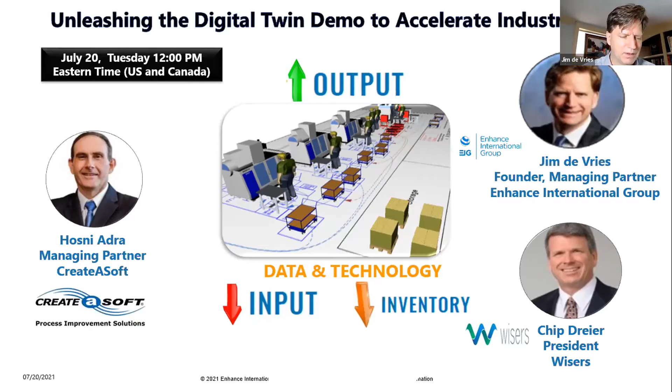Today we're focusing on manufacturing, and webinar 3 will probably be in September. We're still planning that out, and it will probably be in the warehouse management area, but we've done a lot of things in supply chain, so there'll probably be other webinars after that in other industries.

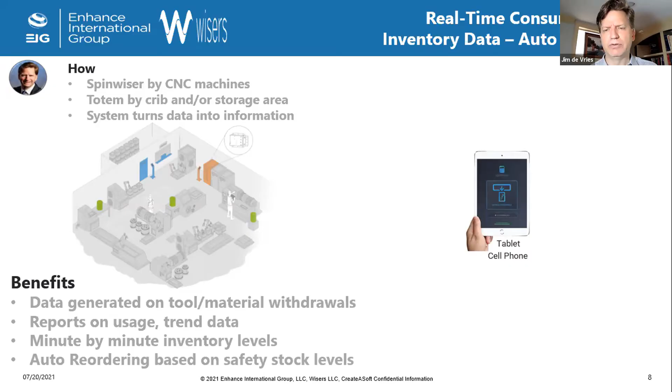So the Wisers system consists of a tablet, or you could use your cell phone, pretty flexible software. And the tracking of devices could be through smart lockers with locks, or it could be with shelves or shelving that's out there today, and you put locks on them, or specific smart lockers that are created.

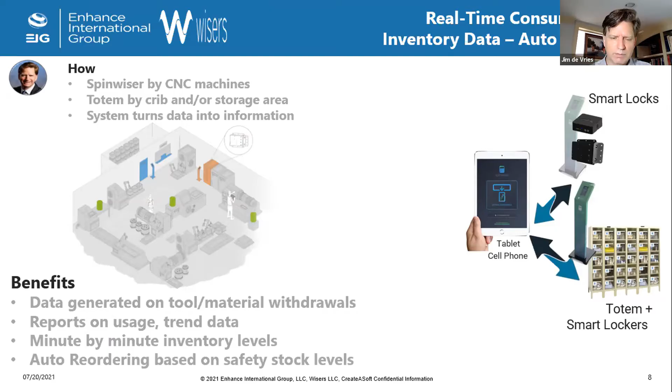And you're tracking the ingress and egress of all your different components that you need, all your consumables that you need. And then the Spinwiser, as you can see here, that has 75 different compartments and 5 doors. It's a carousel, again on the shop floor, close to your CNC machines.

That device is part of the system so that you can track all those consumables. So really, everything's right at your fingertips through a cloud-based system, or you can be on-prem if you like, providing you that real-time reporting of all your consumables, so at the shop floor and your management have clear understanding of where all your consumables are.

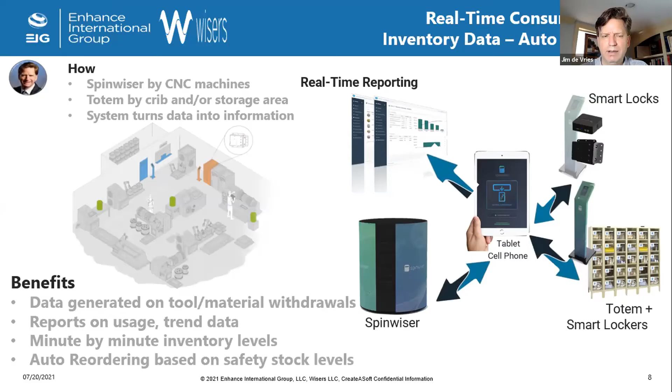You're never going to be running low on any consumables, holding up jobs. And just if you look at the wait time from finding a consumable, having to walk to the storage bin and storage area and coming back, the savings alone on time invested in producing parts is greatly enhanced.

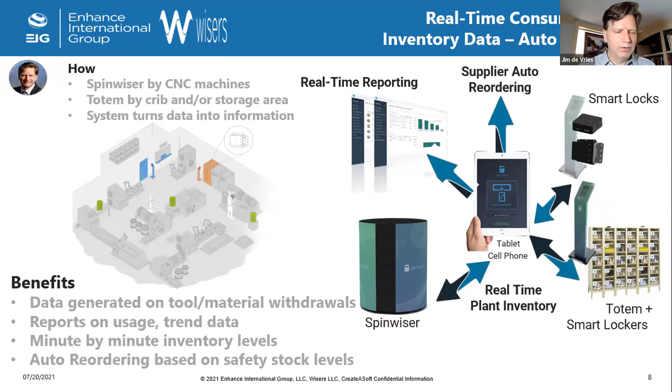So that's Spinwiser. That's a pretty unique system that's out there. And with that, I want to move on to...

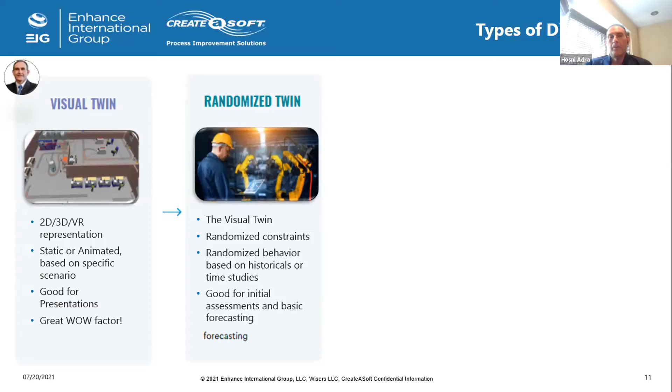The operation after that is to use a data-driven twin. And a data-driven twin does not increase in complexity that much from a randomized twin. It does have a lot of constraints. It has all of the key components of the digitization of the plant.

The one thing that it's going to add to the randomized data is that it's actually going to use your own data set. So what happens if you have seasonality, then you're going to load those seasonal data sets into the model, whether it's how the equipment are performing, the work order, the demand coming into the plant, the resources and manpower that you have, any fluctuation that will impact that. So it's actually going to run similar to how the plant actually would run.

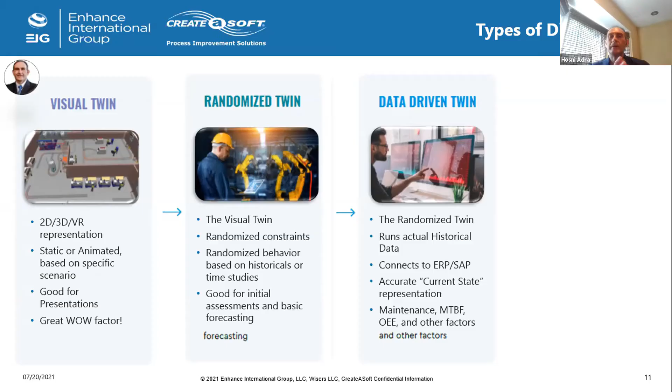So if you compare, say 2 weeks ago, load that data into that digital twin, you should actually see your plant running or your warehouse running based on that data set itself. The other key important part is it has to be able to load what we call the current state. So if you're going to do analysis on a data-driven twin, you always start from a known state that happened in the past, or what's happening at this point in time from the plant itself.

But once you have that data-driven twin, then you can really turn it into a learning model. You have an environment that basically reacts the same way as your operation. It loads the data and consumes the data the same way as your current operation works.

All you have to do now is add that learning aspect of it to say when you have a specific piece of equipment available, just because it's available and I need to run a product on it doesn't mean I'm going to use it right away. It might actually be detrimental to the schedule if I do that, because there's something else coming in the next 15 minutes that'll have better utilization of the equipment itself.

So from that point, you let that digital twin learn from the environment and start giving you better implementation, better optimization on the flow, and it's constantly optimizing in the background to help you achieve where you need to be.

So that's really where we're taking that data-driven digital twin environment, to be more of an online tool that's constantly looking forward and saying, what could happen to my operation? Where would my delays be? And how can I achieve better performance, not just on a day-to-day basis, but hour by hour, or depending on how fast your operation is, even on a smaller time scale.

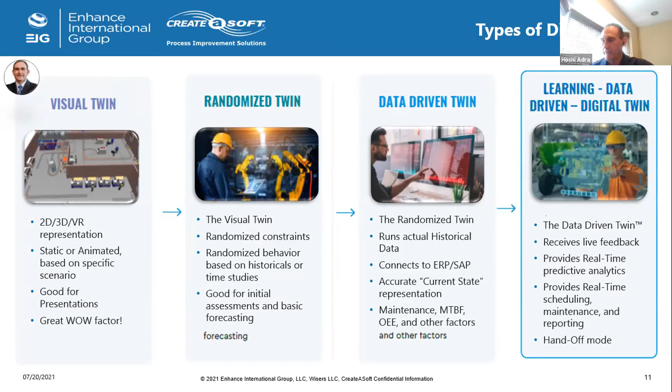From that point, the key to what you need to do is first define what your end goal is going to be and why you're implementing that digital twin. If you're only looking for the visual representation, by all means use the visual twin. You're going to spend the money on it, and it's just going to be different the moment you move one machine or one piece of equipment in the plant. If you're doing that in a warehouse implementation, once you reslot or add another rack, that's totally going to be different from an implementation point of view. So it's very important to define what you need to achieve at the end.

Then identify your progress. What are your target milestones that you need to hit? What are the key pain factors that you will need to address? Where will your most ROI be? And set up a plan of how you're going to proceed through. Then once you define that, really stick to that plan.

One of the key things of all 4 types of digital twin is they're very visual. And whenever they're visual, people will start to get a lot of different ideas on how things could be identified or how they can be improved. So that identification of the target and the improvement plan is very important going forward.

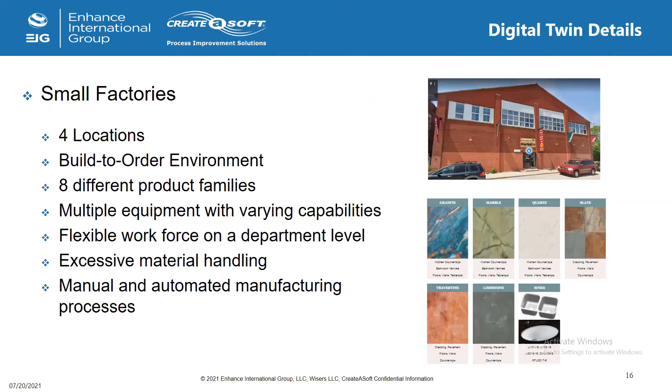So just to give you an idea of what the operation actually is, the plant is organized this way. You have inbound inventory that comes in from their main dock door. Everything goes through the inbound section. They have 2 sets of inbound inventory. At this point, when this project initially started, the products and the families were mixed. So we actually worked with them to organize this, and I'll show you how that was done using RFID data.

The shop manager will actually identify what the schedule is going to be and how the shop is going to run. They have 3 different cutting machines that are going to cut the granite into small pieces. So you're going to get the slab or multiple slabs of granite coming in. They will be moved through a fork truck, assigned to one of these cutting machines, and loaded manually onto the machine. The machine would run for a specific amount of time, depending on what it's cutting.

Then the pieces are pulled out and put on a cart that moves to a polishing machine right in the middle of the full operation. And that finishing area all the way in the back is where they put in an edge, clean it, polish it so it's got that shiny look to it. Then it goes to a QA operation and gets loaded onto a different type of cart, so it can be transitioned to be delivered and installed at a client site. As you can see, it's a very manual operation from that perspective.

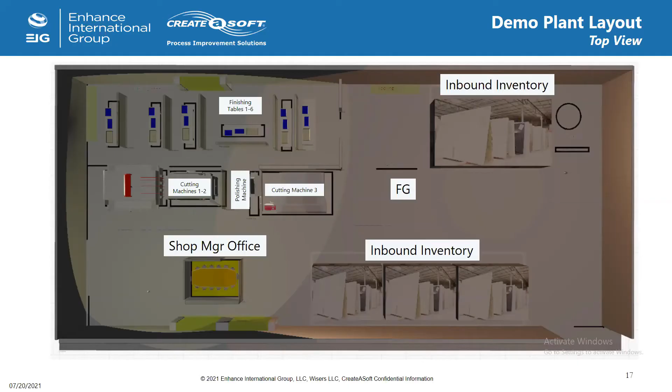So we're going to go through that transformation of how they got into the digital twin, and they're actually going now into that learning phase of a digital twin.

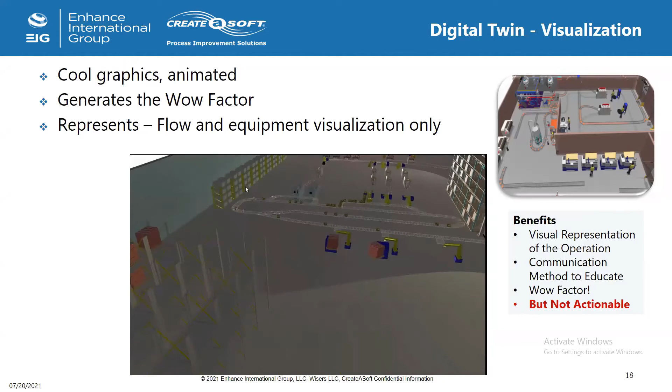From a visualization point of view, the visuals for this type of operation are not the best thing to look at, so I figured from that implementation I'll show you a visual of a much nicer layout. What you would see there is really a wow factor. I'm going to advance this video so you can actually see what's going on. This is a bunch of ASRSs that are going in, robots and material movement and so on. This is all great, it's very visual, it's going to show you what's actually happening within the operation itself.

But this specific representation of that operation is purely visual. There is a rendition of this that actually takes the visual aspect and transitions it to a fully data-driven implementation. But this specific project initiated to be a pure visual representation of a digital twin.

So that's where it all starts. From there you can create the visuals and get some interest from different people, if you need to get the buy-in from anybody on the higher-ups, or just to create that extra interest in the implementation. That's really what that phase comes in handy for. Besides that, it's visual - you can't really make any decisions based on the values. You can't figure out how fast these things are going to run, or how much capacity you can handle through that operation itself. So you really can't. There is no action that you can take from a visual twin at that point in time.

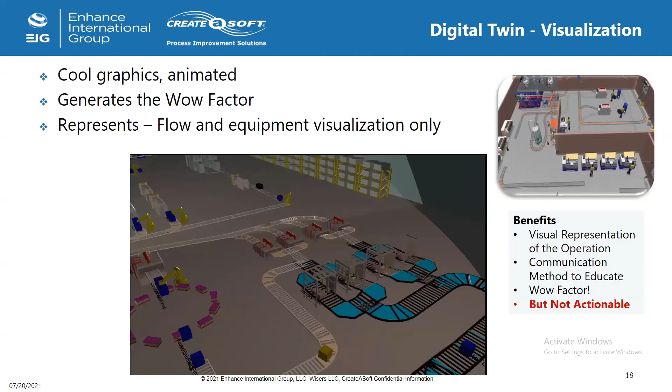So now we go into a randomized twin, and it does contain all of the constraints of the plant from an implementation point of view. Any rework that's supplied, for example 5% or 3.2% of finishing will need to be reworked after they hit QA. There's some slabs that break while they're being cut because the saw was not set up correctly. So all these are kind of QA and rework things that need to be handled within the digital twin, whether it's randomized, data-driven, or a learning twin. All these need to be factored into the operation in order for them to be meaningful in some ways.

So what you're going to see is an implementation that shows a very quick representation of the flow. It's all driven by randomization. So let me turn that on. I'm going to switch to a different section here.

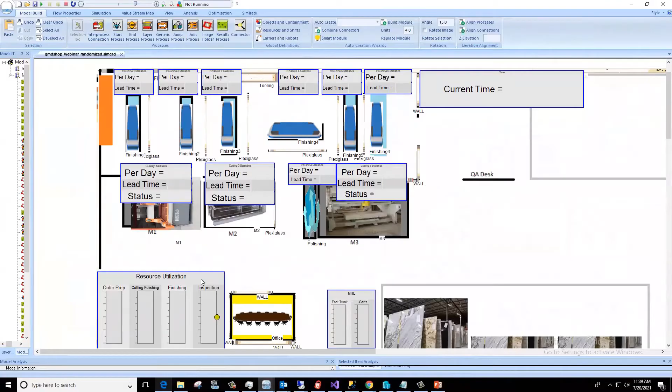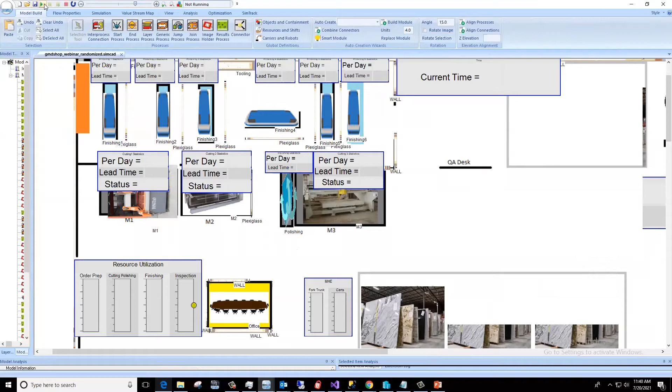So what we're going to do is go through a representation of a randomized digital twin. So you can all see the model there. This is the actual representation of the operation itself. So there's the layout there is loaded, and this is a true-to-scale CAD layout in order to support and identify the distance of travel that anything will take within the operation. So depending on where they actually pick from their inventory, how the items would actually work, the slabs, the pieces will go through, that's all identified within this. And that was the initial representation of that digital twin type implementation.

So I'm just going to speed things up here and kind of start jumping through time to actually show the representation of the twin. So again, it is animated, and you're going to see the fork truck moving. You're going to see things going through. That animation is going to be the same for everything that you have. The same animation could be done in a 3D type representation, just like you saw in that video. So it all depends on what you want the visual to be from the representation point of view.

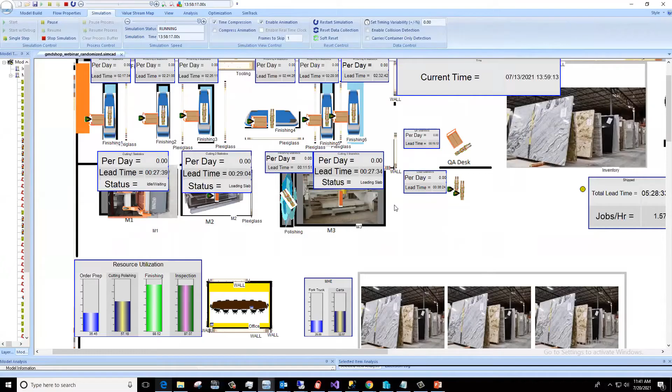Now, the one thing that you have to really be careful about in here is when you run these, it's going to start giving you data on a per day, per hour, what your lead time is going to be for each one of these jobs. But again, these are based on random data, so you're going to get randomized data sets coming out. I'm not saying that randomized data set is wrong that's being displayed. I'm just saying it's not as accurate as it needs to be in order to do valid decisions and valid implementation improvement on the operation itself. So by having that randomization factor into the operation, you're actually taking away some precision from what the actual model is giving you.

And normally that's going to be impacted by how variable the operation is. In this specific environment, it is highly variable. So a granite job, for example, or a marble job could take anywhere between 60 minutes and 180 minutes, depending on what you do in each one of these operations, especially in cutting. They have different cutting speeds. The saw needs to be run at a specific RPM in order not to break the slab. The amount of linear feet that you run through is going to vary. So all that is really going to impact the operation and is going to impact the data that's being presented.

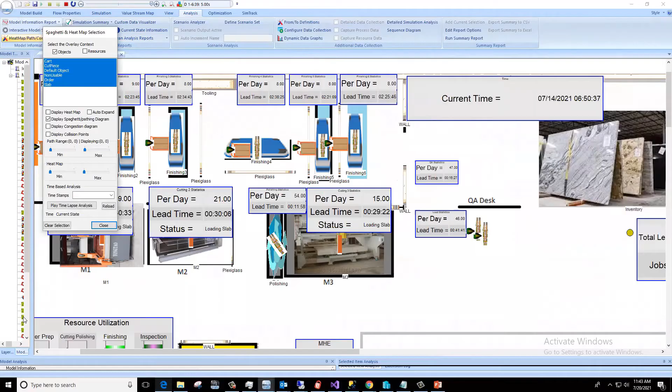So that's going to give you a good representation of where the data and how things are going to flow through. It's going to give you a representation of where the actual setup is. As an example, we can just go in and say, well, what's my spaghetti diagram for this type of operation? And I can start looking at those from a representation point of view to see what the spaghetti diagram is.

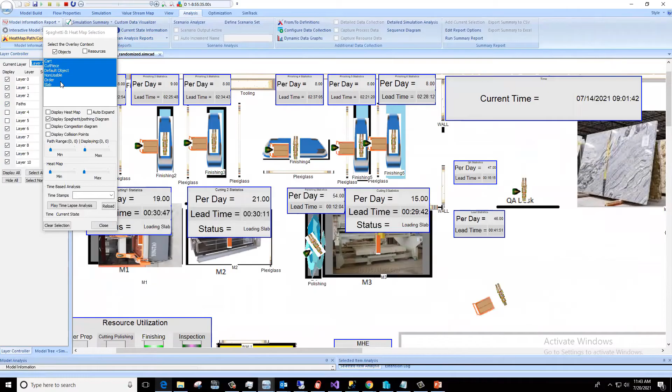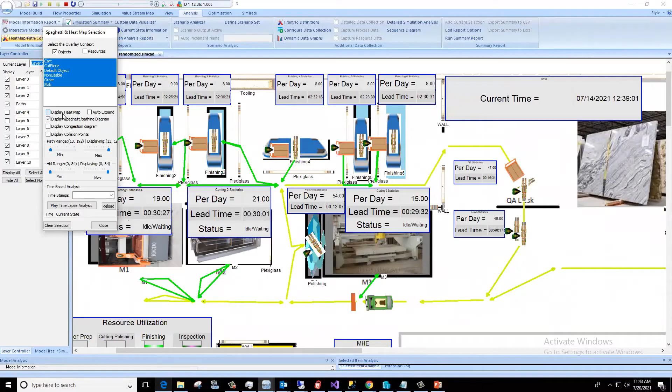Let me turn this on so you can actually see it. And what you'll see is the spaghetti diagram is going to be the same regardless of the operation itself. And it is going to be identified based on color of travel. So that's how they're actually moving within the shop at that point in time. Now, the importance of that is to actually see where there's the traffic, where's the main point of congestion that's actually happening in the operation itself.

And right away, as soon as I turn on that identifier, basically the heat map of the operation itself, you can see that the polishing station is really in the wrong spot in the overall process. And it is kind of the controlling factor of the overall operation. So that's the randomized twin actually allowing me to see that. It allows me to see how the flow is. It allows me to create some kind of direction of where I need to go.

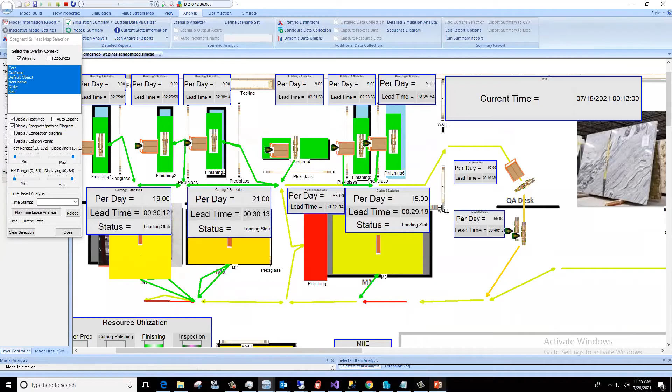If I need to use that to identify if I need to buy another cutting machine or another saw, a randomized twin, if I make a single run, is going to give me a random set that might indicate I need to buy a new one, but it could just be that the randomized data happened to indicate that. So to actually support that, you have to run a set of Monte Carlo simulations to achieve that type of result. That's why I always caution people: if you do a randomized twin, don't use the data right away and assume it's going to work directly for your operation.

You're going to look at the actual data coming out and try to see if it actually makes sense from a randomization point of view.

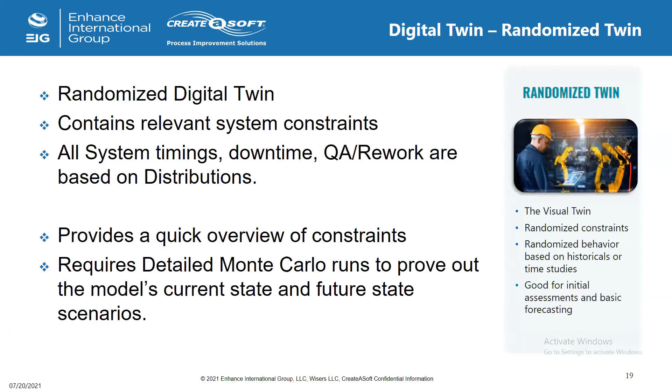And just to build on that, when you're using randomized data, it's all based on assumptions, and you're really looking at data in arrears, not forward. So if your workflow changes in the future, or you think it's going to change, and you start putting in new distributions, that's also somewhat dangerous because you don't know what those distributions are. So it's good from a high level perspective to optimize overall, but not to make more tactical level decisions.

Yep, it's better than just doing a visual. Each one of them is really building on the one before it, providing that extra level of detail that is required.

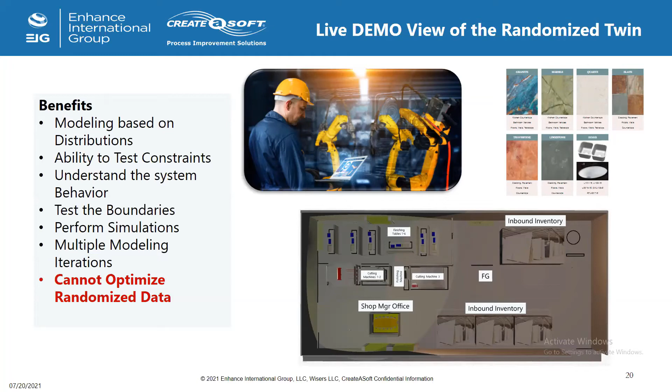The key aspect is that when you go from a randomized to the data-driven model, the amount of extra work you have to put in is very minimal, but it's going to give you detailed representation that gives upward of 99.5% accuracy from a model perspective. So now you can make decisions and say yes, I can support my flow based on a high volume type day and a low volume type day, and on average my days are going to be running in a specific type of implementation driven by actual data loaded from your ERP system.

So in a data-driven environment, you're going to load data, and the data could be in multiple systems. You might load routing data coming from ERP, scan data coming from a barcode scanning system or work instruction implementation, some might be in an MRP system, and you might have PLCs generating data to tell you when equipment or maintenance is required, and how well those machines are actually working. So those are all key data components that you can tie in.

Now keep in mind, you don't have to tie everything together to get it through the data-driven twin. You need enough data so it's a true representation of the plant. PLCs may not always be integrated into the data-driven twin early on in the cycle, but the ERP and MRP data are always at the forefront of that integration piece. What we've been able to do is either tie in directly into those systems and pull the data, or get the data in and pass it on from an Excel type interface.

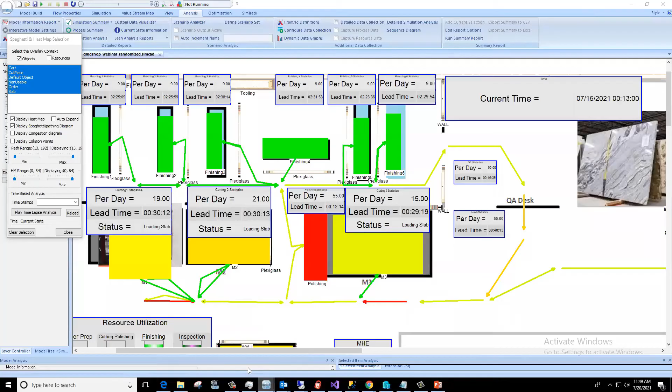So what I'm going to do is switch here to the data-driven twin, and I slightly changed my icon so I can identify which one is which. The visuals are the same, the visuals don't change, you can make them whatever you want. The difference between the two models is now, to do finishing or cutting, it's not based on a distribution. It's based on what that order is, what kind of slab it has, what kind of finishing it needs, and what kind of edge you need to have on that job.

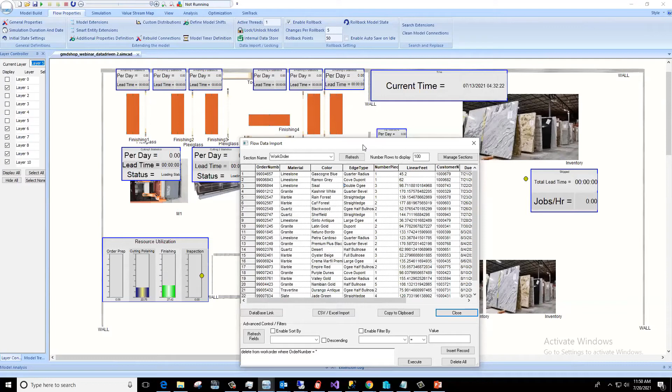So this is actually data that we pulled in directly from their systems. What you would see there is different order numbers, a material that's actually going to be tied in, the colors, the edges that need to be done, and this is the number of pieces. This is very key, both in the cutting and unloading cycle and in the finishing cycle, because that's extra handling that needs to be done. There's also the linear feet being computed and put in from the implementation itself. So that's the data that will come in from the ERP into the work order, the shop floor manager, or whatever is running the operation at that point.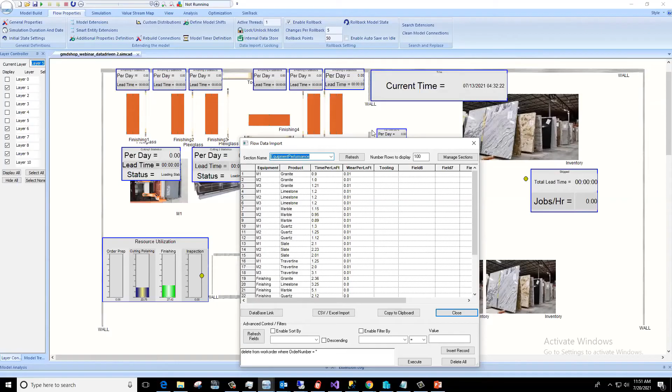At the same time, we're going to look at the equipment performance and identify that depending on which of these machines we're using, they have a different cycle time per feet, and for a cutting machine, it's going to be per cut. So if they're cutting granite on the M1 machine, it's going to have a specific time per feet. So if I'm using granite and I'm on M1, that's the amount of linear feet per minute I can cut effectively without making any adjustment. We adjusted this per linear feet, and this is used later on for the maintenance aspect. I'll show you that when we attach it to the learning system, because that's going to tell us ahead of time when I need to change the blade, clean the nozzles, all these components required to keep the machine running.

And I can do that in real time without impacting the operation, based on the work orders that are coming in. At the same time, I'm going to look at the product routing, and this is basically the type of route that the product is going to go through.

Going from the actual operation, depending on the actual part type - this is really the product family - it's identifying the route, the sequence it's going to go through. What you'd see here is primary equipment. So if I'm cutting marble, for example, I'm really going to try to hit that M1 machine, since it's better suited for marble type cuts. From an optimization point of view, I need to maximize marbles on that machine. At the same time, marble could go on multiple different stations, but granite can only be cut on M1 and M2. So now I have that constraint built into the plant from an implementation point of view.

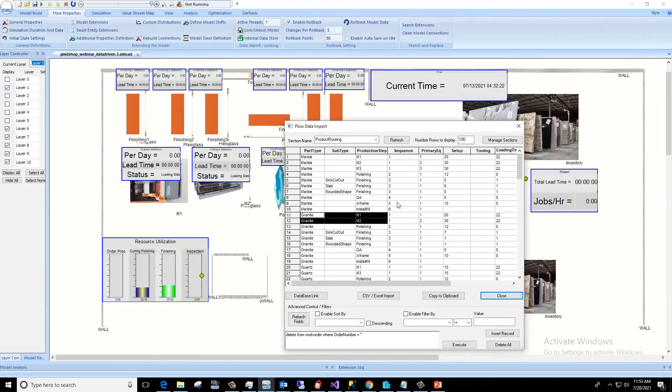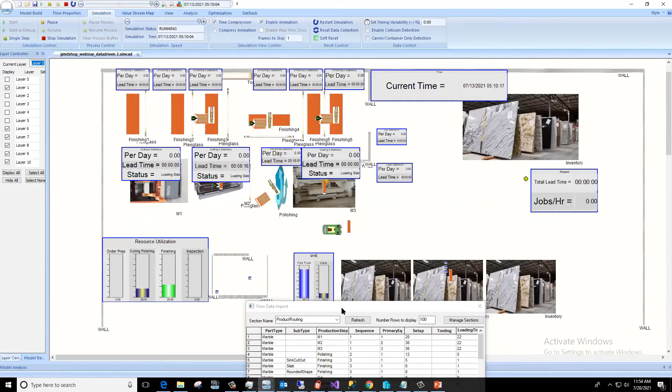So that data is going to go in, and it's going to dictate how the model is going to run. So when I run this, you're actually going to see the representation is going to be very similar, but the results are going to be different. The key there is, although I'm running things based on the same visual, the same path that needs to be made, what's driving the model at this point is this data set that's telling me what that order is.

So as an example, from a digital twin perspective, let me pause this for a second, and I can hover over one of these jobs. What you can see is this is a cut piece. It does have an order number. It is type granite, and it's got a certain linear feet associated within those two pieces that need to be performed on that specific job.

You can go to a different one, and it's going to be a total. This is a marble piece that needs to be cut, and it's 139 feet. So now I'm actually loading that data set, and I'm running that data into the plant.

So when I'm doing my analysis on the operation, I ask: if I add another cutting station, add another saw, add another finishing table, or change the layout of finishing, would I benefit from the operation itself?

I can load my data set from last week and say, last week I was doing X number of jobs per day, my lead time for each job was X. I run it with the new layout, so I'm comparing apples to apples at this point as what actually went through.

And I'll be able to see that yes, my operation is actually going to benefit from that, or it's going to get worse. Keep in mind, not every change is an improvement — there's a lot of changes made that actually put things backwards.

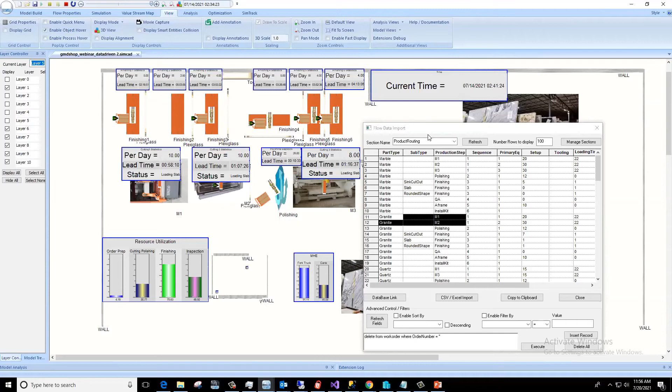They have a schedule to be released from inventory. Instead of pulling all the inventory at the beginning of the day and staging it to be cut, which created congestion for anything leaving the operation to go to the shop for installation, streamlining and assigning a different pull rate from inventory reduced the impact on inventory and reduced the traffic. At the same time, it allowed better receiving processes throughout the operation.

So it's got many benefits from that perspective on that data-driven twin.

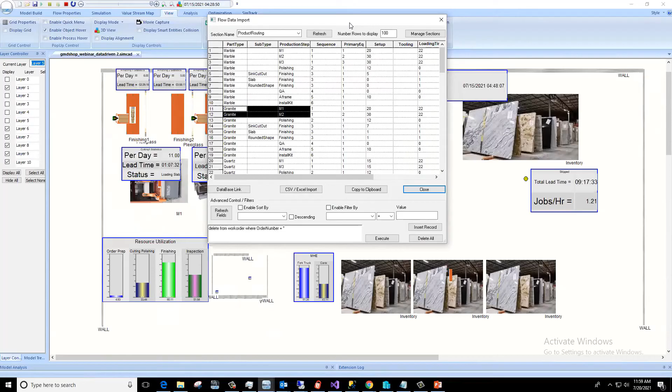Unfortunately, this run took out all of the delays you would have in this area. But based on their order release — what I mentioned before — in the morning, one of their processes was: the shop order comes in and says I'm going to look at all the slabs I need to cut today, and before I do anything, I'm going to go to inventory and pull all of them here and line them up. And that actually created a bottleneck within the operation.

So you'd have 20, 25 carts just waiting here to be cut, while everything else in the plant is empty.

So what that created is congestion from QA, where jobs that had completed the day before could not be released and could not start installation until about 9:30 in the morning. Those trucks could not leave till 9:30, but they actually needed them to leave at 7. That created congestion. In their mind, it was actually improving the operation, but in reality it was making things a lot worse. By showing the animation of that delay, you were able to see that.

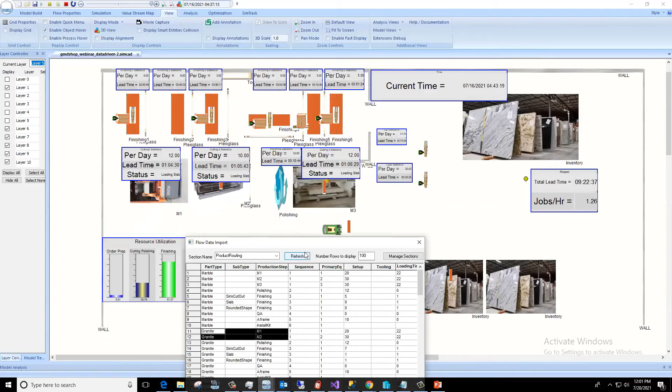The cool thing about any one of these digital twins is that it's actually going to compute how much delay that's creating. One thing we run into quite a bit is they'll say, well, on average the part waits 35 minutes before it enters the polishing station, so I actually introduced 35 minutes of wait time into the digital twin. Please don't do that, because then you're introducing a 35-minute cycle into the operation, and that's not how the operation works. That 35 minutes needs to be eliminated. The environment is actually going to tell you that you have X number of minutes of wait time, and as you improve your flow, that wait time is going to decrease. That's very important from a bottleneck detection perspective.

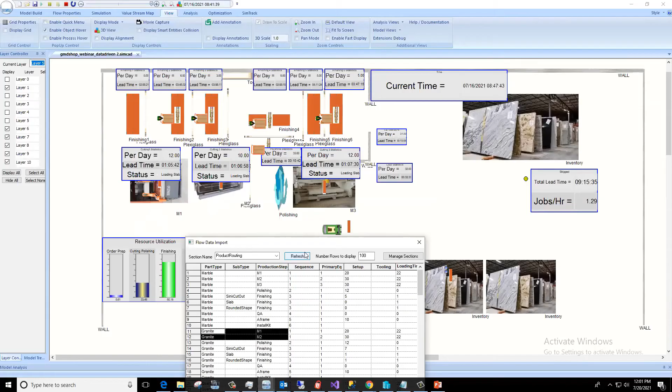In the learning twin, what you really have is the data-driven digital twin at the heart of this thing running. We're going to connect live to the ERP and the data streams that you have that provide data. So the learning data twin, the digital twin, is really going to have as much data as you can throw at it. The more data, the better it's going to learn, the better it's going to behave. So ERP, PLCs, SCADA, any custom implementation, if you are using guided vehicles, AGVs or STVs, all that data could be fed into the digital twin.

RFID and barcodes are invaluable if you want that extra visibility into the operation. From that point, any tooling type systems or additional systems, like the Wisers consumable tracker, can be tied in. By tying that consumable to what's actually being produced and how much usage you have for each of the different items, you can feed that data back into Wisers to do the proper replenishment of those units or tools as needed, so you don't have more than what you need of the wrong type of tool.

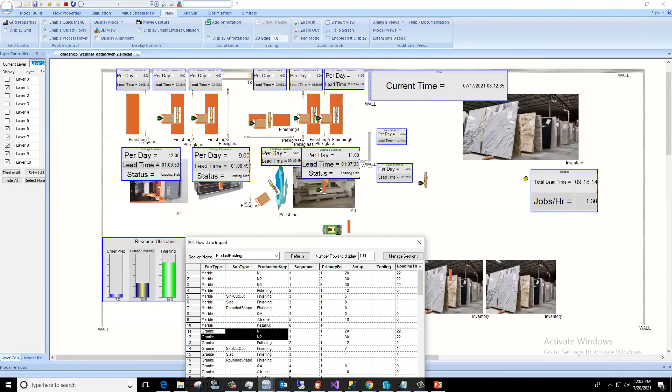Let me switch here to what you would see actually from a data-driven type implementation. Once you go into the data-driven twin, the learning twin, the interfaces will actually be more driven towards web interfaces, because that's going to be viewed by a lot of people throughout the organization, not just limited to the people doing the analysis and optimization.

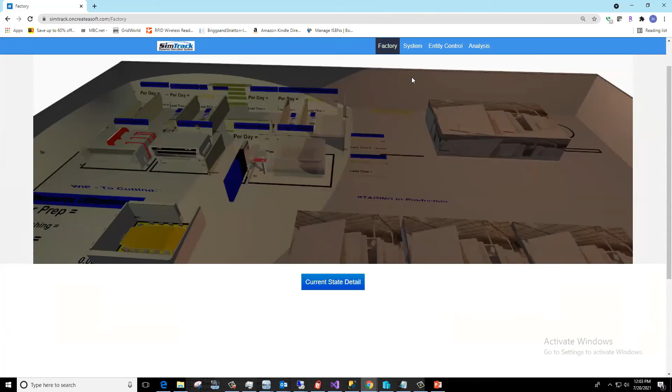So I can, from that point, look at the current state and see what's happening at each of these stations. I know when each order number has started - this is a snapshot of their operation - when they started and where they're actually going to be in production. So all that is delivered and made available.

Then you can go into specific representations and see what actually happened within the flow itself. Based on what we have and what it knows, it's forecasting that before the end of the month they're going to have 283 additional orders that have to go through the finishing cycle at this point, and there are 5 that are still pending that have to be scheduled on the operation itself.

So all that data is now going to be available to anyone who is either on the finishing side, on the management side, or the shop floor side, and it's all real-time data coming from the plant itself.

From that point, you look at the actual machines and think, what's going to happen to my machine from that point of view? What's my blade saw doing? What's my utilization? Who's doing different tasks on the operation itself?

So the key there is you're seeing the remaining blade life on that specific saw, and it is consuming water, so it's actually generating the gallons per hour that it's consuming at that point in time.

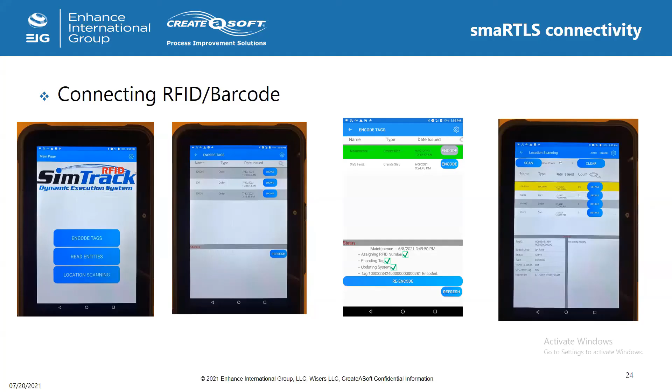Are you sharing your simulation screen or the PowerPoint screen? I'm sharing the PowerPoint screen at this point. Oh, all right, all right.

Good. So from that point, you can also tie it into integrating tooling, and that's the other part that's going into, identifying when you actually need that tooling based on consumption rate. So the PLCs are providing data on what needs to be produced, or what is being produced, and what the consumptions are for each one of these components.

The work orders and what needs to be produced is looking ahead to say that in 20 days, one of the saw blades needs to be replaced. That tooling is automatically put into the system. It will be available when that blade needs to be replaced and when it's scheduled into the operation itself.

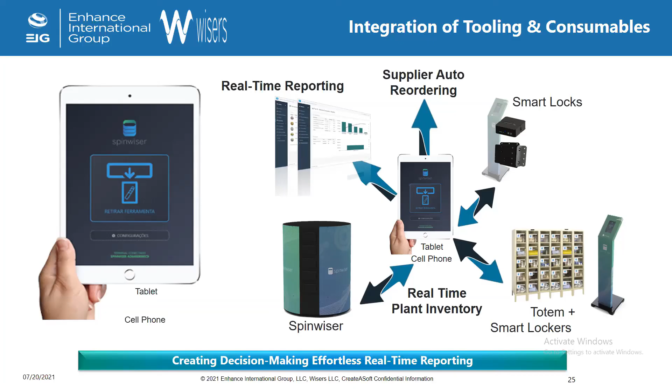There's also unscheduled downtime that's going to happen, just like any other piece of equipment. Those will be identified, and it will plot when specific pieces of equipment actually will go down and will adjust. I kind of went through this one a bit quicker from a timing perspective.

These are just sample dashboards that I actually showed you early on from the actual system, and that's available for them to basically use. So the key to all this is this model, this future state computation, is actually performed every 30 minutes for this operation.

The data and all of the forecasted analysis is generated every 30 minutes, and it's based on that real-time data and that current state of the implementation. It's identifying all the manpower allocation that they need.

Anything that's going to be delayed is visually viewed on those dashboards, and then it's moving into full optimization of the schedule. So instead of the releases being done by the shop manager identifying what I'm going to release today, the system is actually going to reshuffle those orders to maximize the efficiency and send the orders through.

It's all driven, as I mentioned, by a neural network that's running in the background, learning from the environment itself, and providing that optimization in real time into the operation.

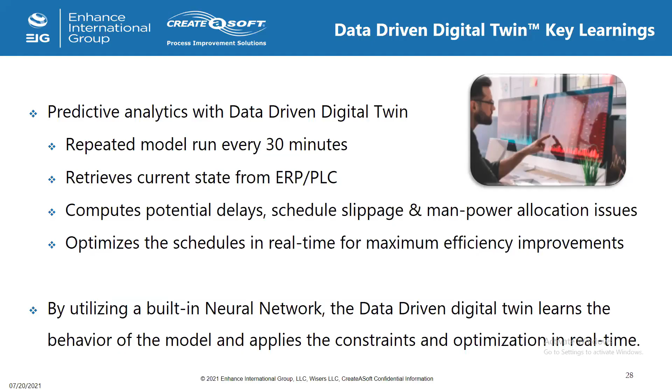So that's kind of the overall view of the system itself, and all the different interactions that you would have. It actually will generate.

Didn't get to show you the value stream mapping, but each one of these digital twins actually generates a value stream map that is representative of the operation itself, and it's representative of the current constraint of the line.

So it's not a value stream map that was done based on a specific time study that was done sometime in the past. It's actually your current value stream based on current efficiencies, current wait time, value added, non-value added time, and lead time on the operation itself.

So that's really the key component of that dynamic value stream that's changing based on the operation itself and how it's being affected by the different constraints within the implementation.

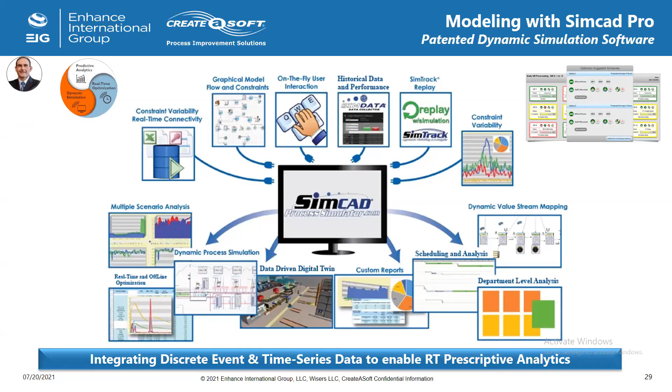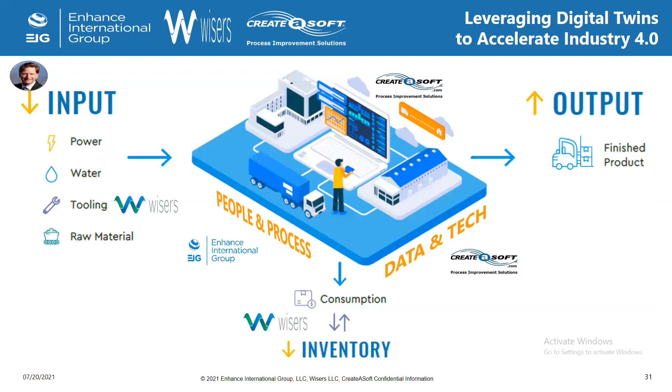So Jim, I'll turn it over to you. Great. I think the key here is that...

What we used to do with rolls of paper and team meetings—not to say you don't need those activities to get alignment with everyone—but when you combine this visibility with those team meetings and you're looking at actual data, those meetings about changes and improvements you need to make in the manufacturing floor, hospital, supply chain, whatever the application may be, you're able to have meaningful conversations using that data-driven digital twin. And if you can get to the learning system, there's huge power.